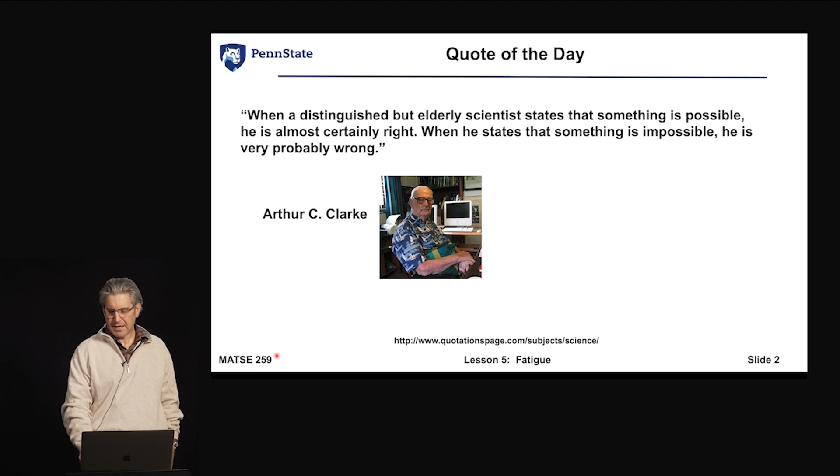As we do with most of these lectures, we'll start off with a little quote. This one from Arthur C. Clarke. If you've seen 2001 Space Odyssey, it was his book initially. He's a science fiction writer. I tend to like this one because, when somebody, in this case he goes like an elderly scientist, but you can look at it as more professional, because I'm not sure whether you look at me as elderly or not. I'm not quite at that level. But they tell you when something is possible, is always right. When something's impossible, probably very wrong. So sometimes what he's getting at is we get set in our ways. And I think fatigue is one of those things because it sneaks up on us. I saw really a connection between this type of quote and what we're going to be talking about today.

So when we talk about fatigue, it's not so much the tiring or you're fatigued listening to me in these lectures as they go on too long. But really what fatigue is, especially in design and in materials and in mechanical properties as we study them, is really the idea of cyclic loading, where we load something up and we unload it. So it's very much like real life. We saw that example going back to the initial lecture that I gave and showed you the Aloha Airlines flight, where really the fatigue in that case was the loading and unloading on the fuselage of pressurizing and depressurizing the cabin as they would go up to altitude and back down.

One thing to bring out of the fatigue curve, and something that is a bit of a pet peeve of mine when I'm talking to other engineers or talking about people with design or in some of my previous positions, is when fatigue came up, people will typically say it has a fatigue strength of X. But in fatigue, that doesn't really tell you anything because you know the stress, but you also have to know the cycles to failure. They both define fatigue. So you'll hear when I talk about fatigue, and we'll keep harping on this.

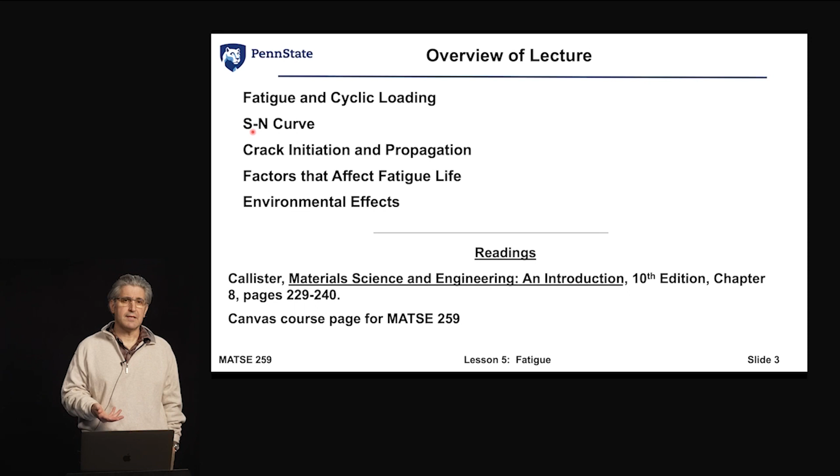And we'll talk about factors that affect fatigue life. I guess the way I look at it is things that show up in the toolkit of whether it's a materials engineer or a structural engineer or a design engineer. When you're designing something, what can I do to try to extend fatigue life or mitigate fatigue? And then the environmental effects that come into that, because there are things like corrosion fatigue that we're going to see that are out there that are growing in consideration and study, because as parts get older and our components are lasting longer, we're exposing them to different environments.

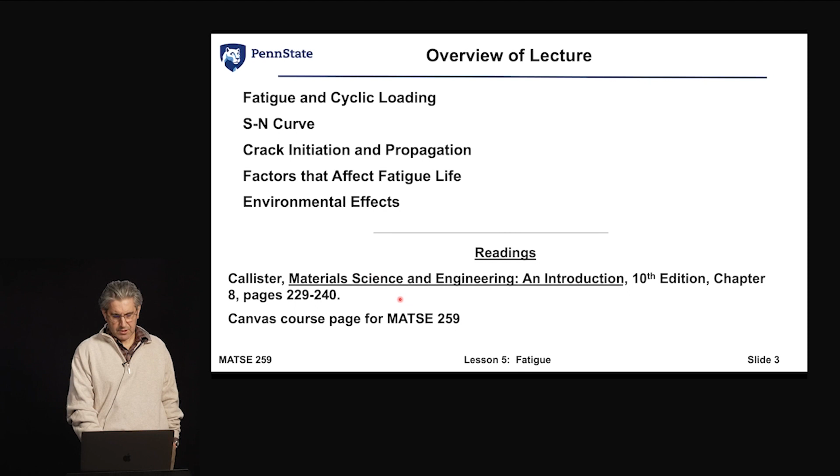As climate change comes around, some of these existing environments that we're putting materials in are going to differ, so these are things we need to take into account. Just on the baseline of that, go to chapter 8 in Callister if you don't understand anything, and always check the Canvas pages.

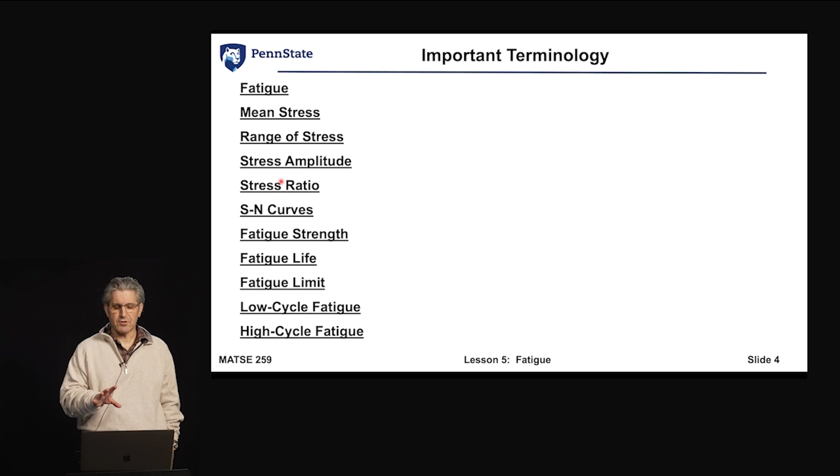So what is fatigue? It's a failure mode that occurs when structures or components are subjected to dynamic and fluctuating stresses. Typically the stress levels we're continually exposing and applying come down below the yield strength - considerably lower than the tensile yield strength - but we're going to concentrate primarily on yield, so it's in the elastic section of the curve.

Now you start thinking about that - they shouldn't fail, they should never fail, correct? Because it's well below the ultimate tensile strength, the strain levels we're talking about. But what we're going to see is that failure occurs. The scary thing is that about 90% of all metallic failures, by estimate, occur by fatigue - they fail other ways too, but fatigue is up there. So you'd assume with something that occurs so commonly, we'd study it in more detail.

But we typically don't. Another thing to note is that the failure modes are brittle - the fracture surfaces look different than that dimpled surface we talked about with ductile failure mechanisms. Really no plastic deformation, little to no warning. That's where catastrophic failures come in, where something fails without warning catastrophically, and we're going to see what can happen with that.

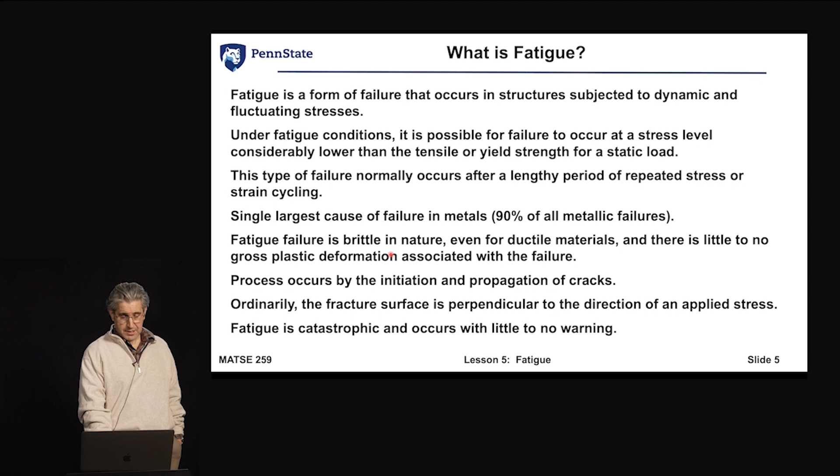So a couple examples - I'm going to show one video here, an animation. This was an F-15C at the time, in 2007, a training flight over Missouri. What you'll basically see is this aircraft, a fighter interceptor F-15, being flown by an Air Force pilot - a fighter pilot doing what fighter pilots typically do, wanting to go fast. He's sort of the Ricky Bobby of pilots. What we're going to see is he had a bit of a surprise: the aircraft literally broke into two pieces due to a fatigue failure. I'll let you watch the video, and you can imagine his surprise when it happened.

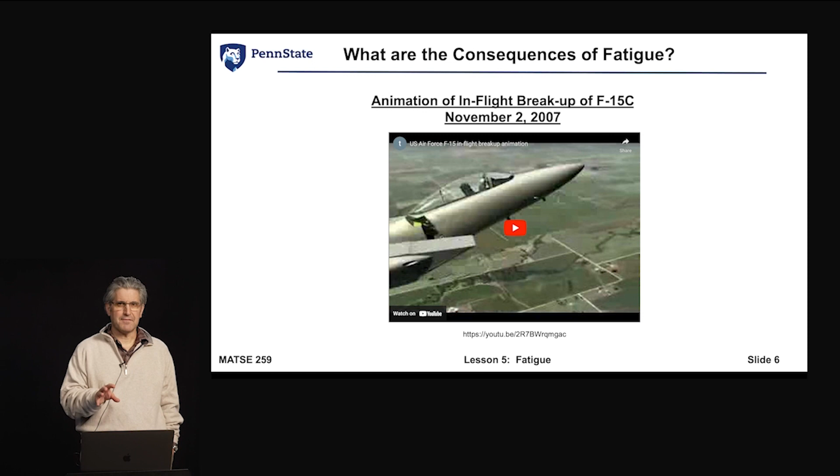This pilot was on a training flight and he survived this in real life. But there were two incidents where these things happened, and the U.S. was forced at that time to ground the entire fleet of F-15s to try to figure out what it was. So we'll let you watch the video first, and we'll go into what actually happened.

So as you can imagine, he was a little surprised by that, and a lot of people were. This was a really pretty big deal when it happened. So they started really going about it, grabbing what was left of the aircraft on the ground and looking around to see what was going on. As they started looking through other F-15s, they started finding a concerning crack developing.

The longerons are these structural components, and you can imagine why they call them longerons. They're along the length of the aircraft, so they're longitudinal members that basically transfer skin loads to the internal structure. But they started seeing fatigue failures in them, so they had to go through and replace all of these structural components because these cracks started occurring.

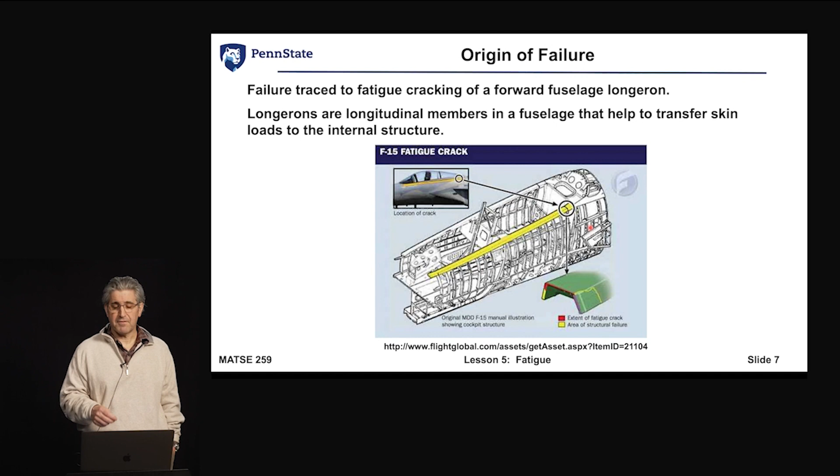Now, another one I'll bring up: fatigue led to the deadliest air disaster in American history. In 1979 at O'Hare, a DC-10 crashed. This was the last photograph of it. What happened was the left engine - you can see the smoke there - literally came off the aircraft on takeoff, and it sliced through the hydraulics on the back of the aircraft, ripping through this 3-foot section of the leading edge. So they lost the leading edge of the wing.

The hydraulics were all gone. The pilots had no control. There were 258 passengers and 13 crew members. So basically at O'Hare International Airport, if you've ever been there, it crashed off the end of the runway into basically a warehouse. Now, what led to that?

So it's a little different than just old life - this was a fairly new aircraft, 1979 DC-10s. If you follow aviation history a little bit, DC-10s have never had a really good history, especially at that time. There was a problem with a cargo door - they had cargo doors coming off in flight. There was a major accident at Paris de Gaulle International Airport where an aircraft crashed on landing because the cargo door came off.

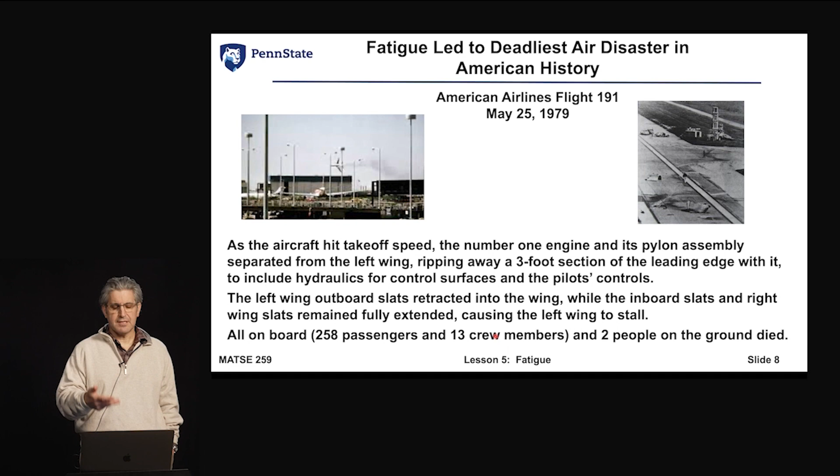The cargo door went through basically the tail section of the airplane, and there were a couple other accidents. So this aircraft in and of itself had a bad history. But part of what led to this one - as they started looking at it, this isn't a case like we saw with the F-15 where the aircraft just got old and the fatigue cycles built up. This was a case where they actually induced conditions that would lead to fatigue failures.

As you can start to see, they used what was considered an unauthorized maintenance procedure. In order to work on the engine, they had to remove the entire engine housing from the wing, and they're required by maintenance schedules to pull these engines off and look at this. The DC-10 was a Douglas aircraft - a McDonnell Douglas aircraft part - and the McDonnell Douglas requirements for it required them to almost manually take this off. They had to have lifts, and it was an incredibly long procedure.

So American Airlines basically found a way to try to save 200 man hours - that's a lot. Time is money, and these types of man hours and labor costs are one of the big cost drivers for the aviation industry and commercial aviation industry. So they found a way to try to save it: they used a forklift to lift the engine up and place it back in.

Now, if you think about it, United had the same problems - they had the same aircraft in service, but they used overhead cranes to lift it up, so you had a lot more control with the overhead cranes. The forklift lifted it up, and basically on the pylon, they were pushing the engine into it, and the forklift kept running into the pylon until they could get it straight.

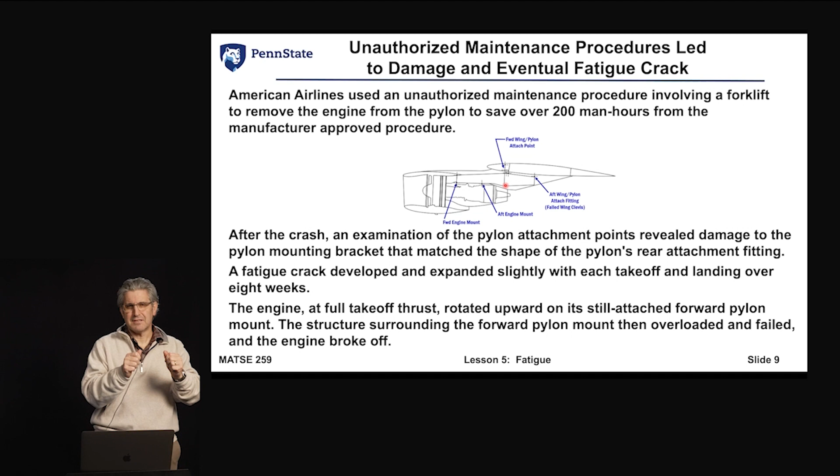So what they did was they started inducing surface damage on the pylon. What we're going to see is surface damage is one of the leading initiators of fatigue failures. So this was basically a maintenance procedure, and not really thinking through how you were doing that maintenance procedure led to an eventual fatigue failure.

And so the fatigue crack developed and it expanded over an 8-week period after they had taken it out of maintenance. This goes back very similar to that Kansas City Hyatt Regency disaster we talked about before, where not quite understanding what you do during manufacturing or maintenance can impact design requirements.

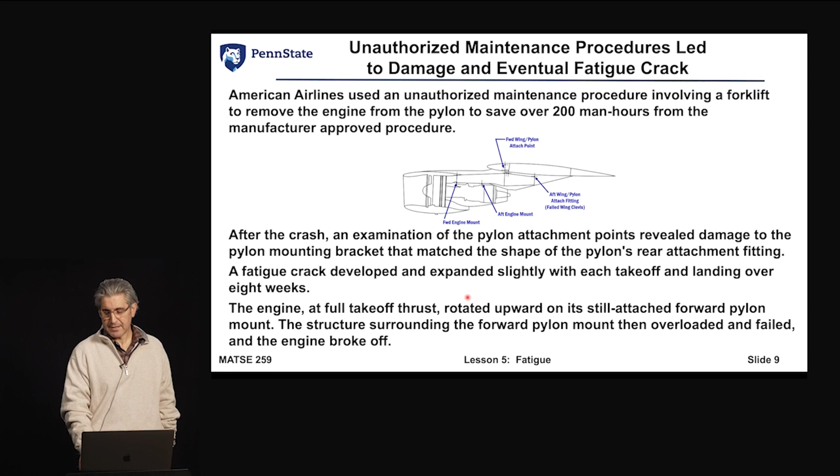So we'll step away from those, and now I think I've got your attention at this point on how critical fatigue is and how we really need to consider it.

So how does stress vary with time? There's a couple different ways to do it, and what I want you to think about as we look at these is that in practice it's probably going to be a little more random than we tend to think, but how do we standardize a process for looking at fatigue? That's sort of where we...

We can reverse stress cycles, where we go from tension to compression, or we can repeat the stress cycle where we take it up to, in this case, in tension at a maximum level, bring it down to slightly in compression or not in compression. We can take it down to a little above zero and then back up where we're repeating the stress cycle, or we can just have these random cycles.

The random cycles, as far as a testing procedure, if we can't do it the same way each and every time - what we're going to see is scatter in fatigue data is another real problem that we have - is that you can't really test it. There's no baseline for getting a good measurement of what the fatigue properties of the material are.

So we can test them either tension compression, and this is probably one of the more common ones. We can bend or we can twist, this torsional loading. Tension compression and bending are the two most common standard test procedures. Rotating bending fatigue is another term to use along with the axial fatigue levels.

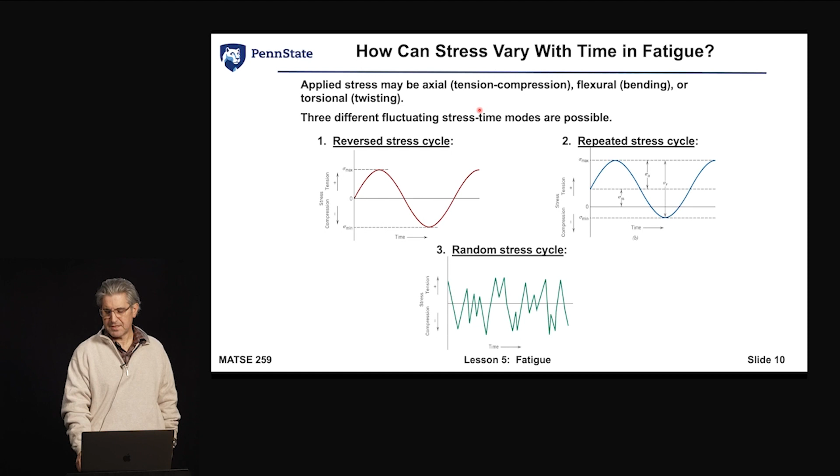So in my research group, we're actually thinking about a little bit of these types of things. And what we tend to see in the reverse stress cycle is this regular sinusoidal dependence - looks like a sine wave. The amplitude is really symmetrical, and it alternates between a maximum stress to a minimum compressive stress.

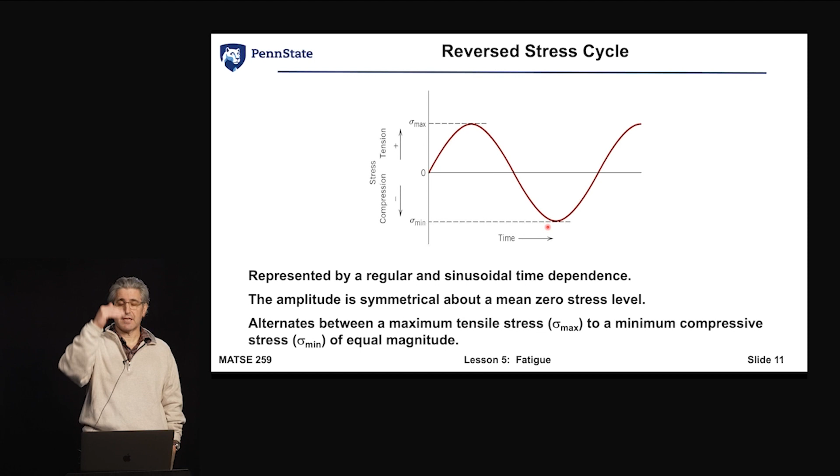So we're taking it in compression - basically taking a bar, think about it, pulling it, squeezing it, pulling it and pushing it up and down. Repeated stress cycles are a little typical to what we look at.

So what we end up with, we can define a couple different things. We have our maximum and our minimum stress. We can define a mean stress out of that, or just the average of it, as it says, the range of stress. But the stress amplitude is mostly what people will define. It's basically that max minus the min over 2. Very similar to what we had with the mean stress that we had looked at.

Now the important one to come out of this is the stress ratio, the ratio of that min to the max. So you're going to see people talk about doing fatigue testing, and they'll say, I have an R value of 0.1. That tells you, for the most part, in this case, we're considering tension to be the plus, the positive, compression to be the negative. So if you don't have a negative value there, if it's just 0.1, it tells you that it's always in tension. So 0.1 over 1 tells you that your minimum is at 0.1 of your maximum. So you can normalize these and think about it.

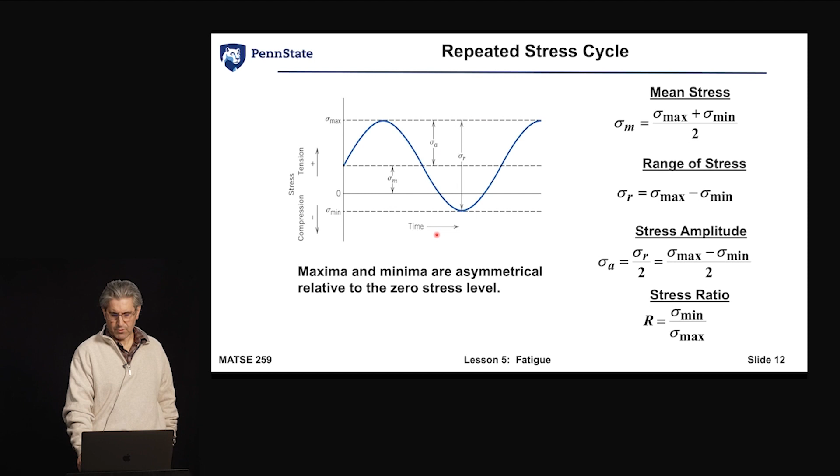So if R equals -1, your max and your min stresses are equivalent, but one is negative. You should have fully loading and unloading. So when we think about a reverse stress cycle, that's an R value of -1. So random stress, you really can't define this - it's not something standardized.

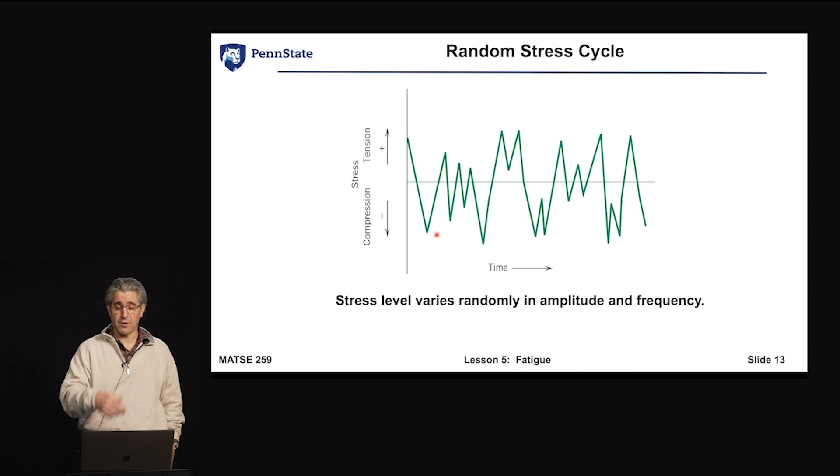This is more something you would put into service or look at service conditions and try to track if you have, for the most part, the analytics or the telemetry or sensors on it to tell you what the stress levels are, and you're looking for peaks and valleys of the stress you're seeing.

Now in fatigue testing, what I showed here is I just grabbed one example. An axial tension test is very similar, so for the machines you would look at the sample geometry. It would be a little different because in fatigue we worry a little more about these sort of fillets here.

So I've had students correct me on this. A fillet is something I like to have with dinner. A fillet is what I'm looking at here, or at weld joints.

It's almost a point of contention in this testing that people cannot agree on what this fillet can be or should be. So you tend to see a lot of rotating bending fatigue, usually done in terms of corrosion, but most is done as axial fatigue, and those systems look exactly like what you'd see in a basic mechanical or tensile test.

But what we see here is a lot of control going on, and standards that tell us how to do these types of tests. We always go back to these ASTM standards for sample geometry and for testing modes.

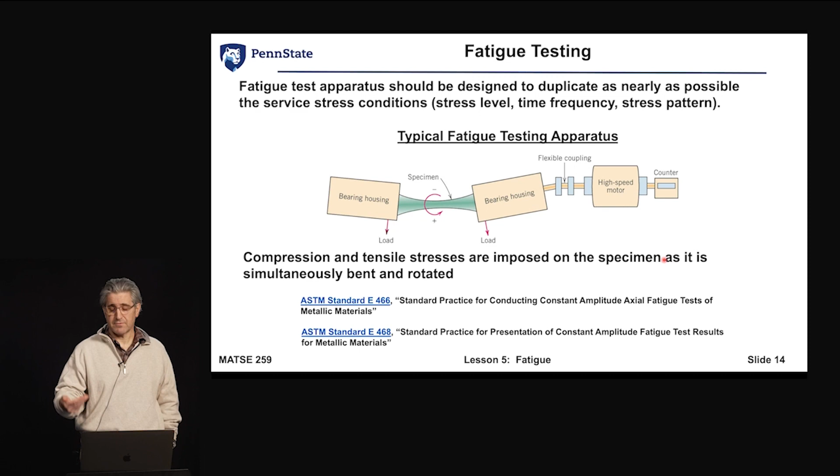So a couple other ways - I wanted to show what you typically get in practice. Outside of standard fatigue tests, bicycles are one area we can point to and say yes, they see a lot of fatigue, especially the frames, as you're pedaling and hitting bumps in the road. We know this very well in Pennsylvania, that our roads aren't always in the best shape, so you're either running over cracks or you hit a pothole.

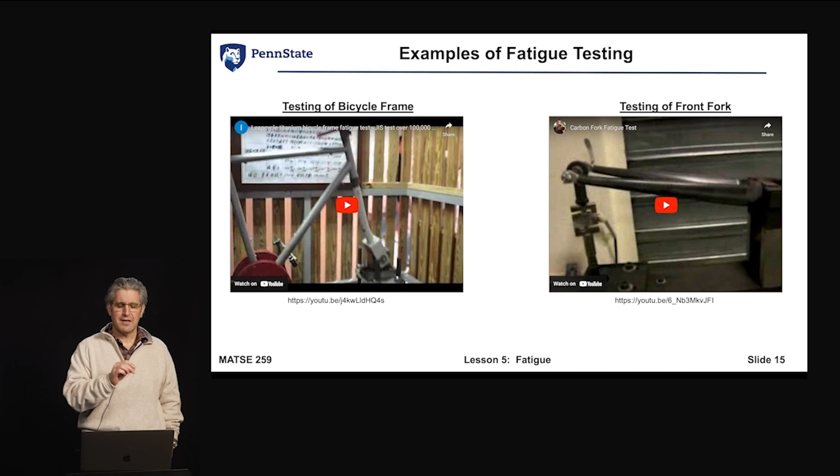So these are a couple different tests you can look at. They don't tell you a whole lot about the actual fatigue life, but this is sort of what we consider an in-service type test for looking at fatigue.

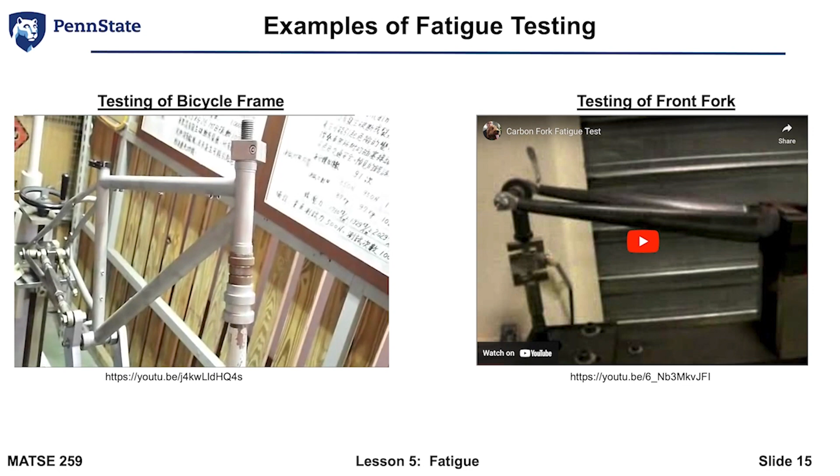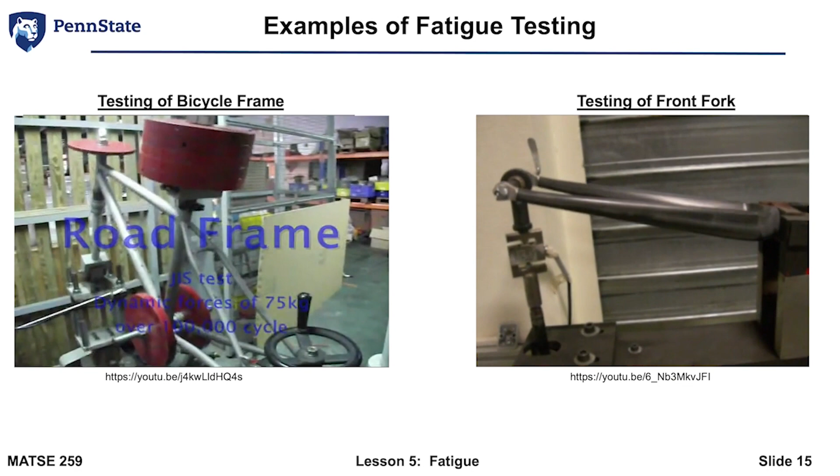So if you're the engineer running those tests, not a very exciting test - day in, day out, probably just running through loads and watching them, trying to figure out at what point they fail. They have mechanical counters to tell you the cycles, but they don't tell us how to construct SN curves.

SN curves come out of this idea of being able to have our engineering stress-strain curves for fatigue conditions, and they look a little different. On the y-axis we have the stress amplitude we calculated earlier when we talked about stress levels, and on the other axis, cycles to failure.

Usually that's a logarithmic scale, because when we talk about cycles to failure we see these different numbers at typically pretty high levels - 10 to the 4th, 10 to the 5th, 10 to the 6th, 10 to the 7th. So we're talking about millions of cycles that we test at a given stress amplitude.

So we want to subject this specimen to stress cycling. One way to start, usually a starting point, is about two-thirds of the static tensile strength - though in most cases I'd probably substitute the yield strength instead. You test it at that stress amplitude level, get your number of cycles to failure, and keep your R value consistent.

What you can start doing is just repeating these tests over and over again. The fatigue strength is the stress level at which failure will occur, and the fatigue life is the number of cycles to failure at that given stress level.

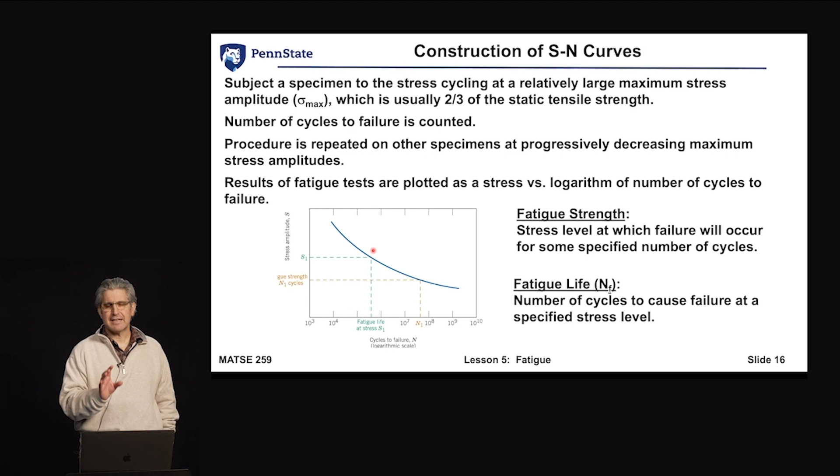So when you start talking about the statistics of the scatter from this SN curve, how you determine this line, how you determine safety factors, and identifying uncertainty and variability—all these things statisticians tend to do—fatigue is really where a lot of that gets put to the test. So there's a lot of use of these terms. Having that inherent scatter in mind as we work through this is important.

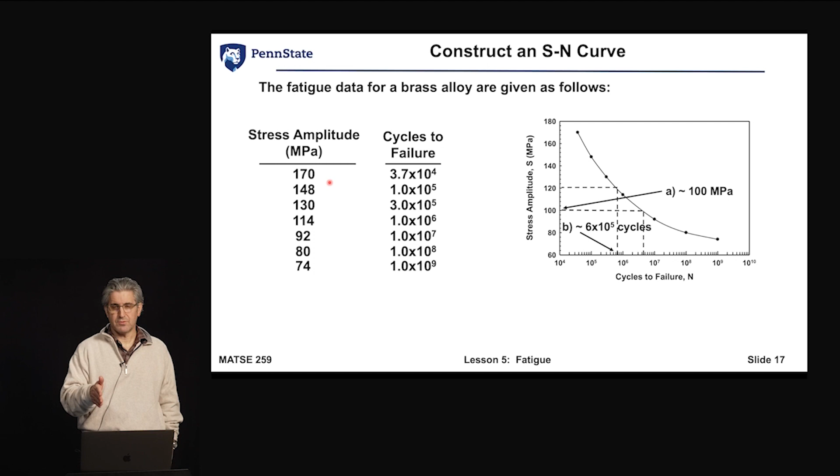So how do we construct an SN curve? We see here a nice SN curve; we start with a certain number of tests. These SN curves aren't calculated per se—they're based on actual experimental data. We start with different stress amplitudes, and as good experimental practice you do probably at least 3 tests at each stress amplitude. So you end up with error bars or an idea of what that scatter would be at each point, and you count cycles to failure.

What we see is that for a fatigue strength at 4 times 10 to the 6th, it's about 100 megapascals. The cycles to failure actually went down to a point—so it's at a lower level. As we go to 120, we're going to a higher stress amplitude, and our cycles to failure goes down, as we see in the curve.

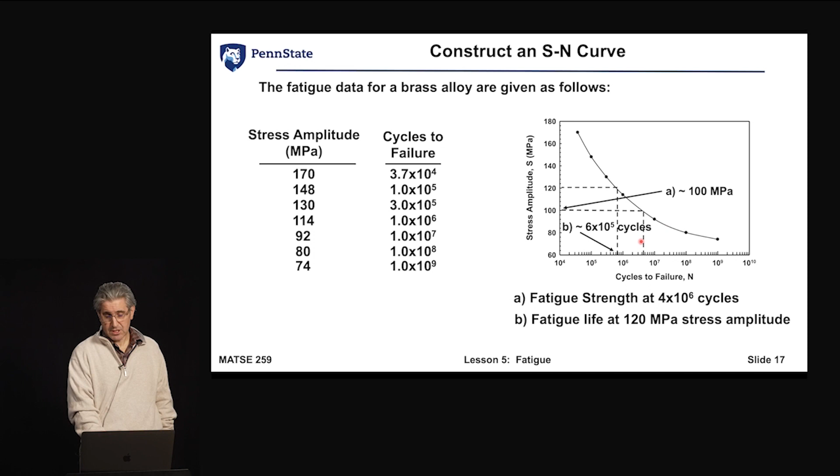So they take on this declining shape with amplitude—high stress amplitudes, low cycles to failure. What we see is that's low cycle fatigue. High cycle fatigue is low stress amplitudes, high cycles to failure.

Some materials, though, provide us with something really interesting. Rather than continuing down into infinity or near zero, they reach a point where after a certain stress level, it goes no lower—they don't fail by fatigue. What we typically call this in testing is a run out. So we'll test something to say 10 to the 7th or 10 to the 8th cycles without failure and call it a run out—it didn't fail at that point. This is how we start to define fatigue limits for a certain number of stress amplitudes or cycles to failure.

So we can limit the stress level. If a material displays a fatigue limit, or endurance limit as it's also called—typically ferrous-based materials and titanium alloys—it's usually between about 35 and 60% of the tensile strength. We basically make parts big enough that we get the stress levels down below this fatigue limit, so we can feel a little better that we don't have to worry about fatigue. Fatigue becomes a non-issue.

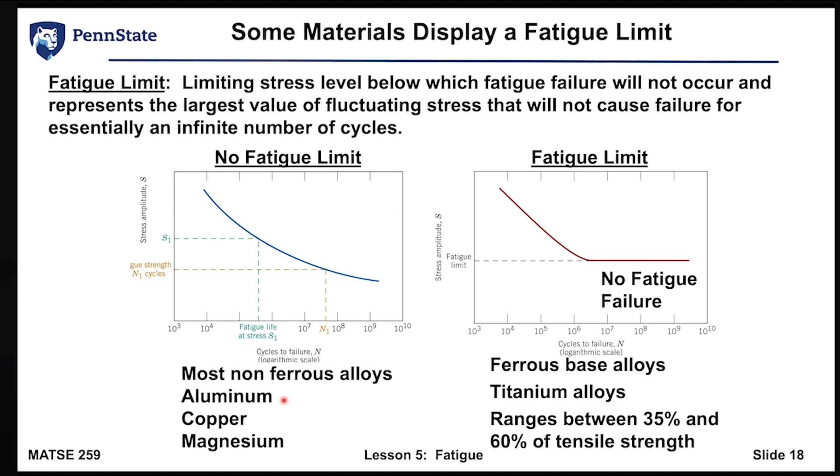Now, what we notice here is non-ferrous alloys tend to display no fatigue limit—things like aluminum. Where do we use aluminum a lot? Aircraft. So when we think about how aircraft operate, aircraft are susceptible to fatigue failures because of the material choices we made.